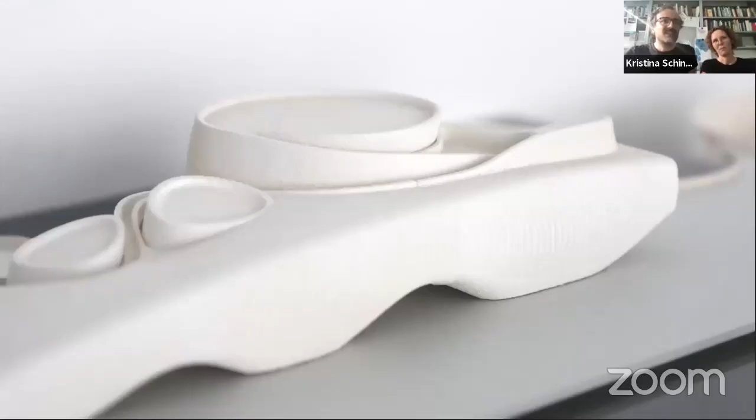Okay, thank you for the introduction, Lara. Thank you also for the invitation to have us here at this TACK Talk online lecture series. We are very excited to be part of this research network investigating tacit knowledge in architecture, and we are very much looking forward to exploring that with all members.

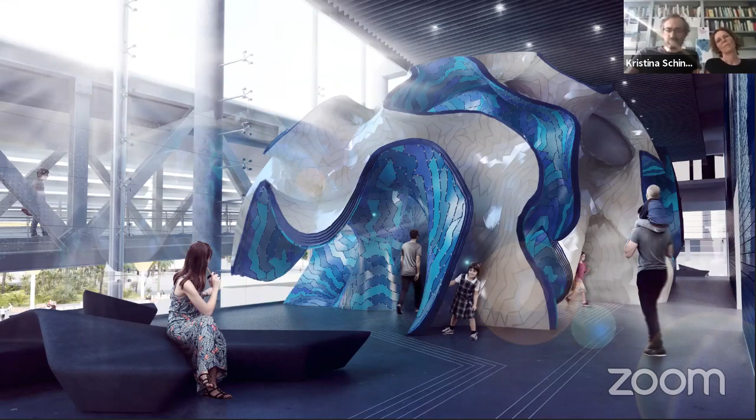As Lara mentioned, our name refers to the sentient body. For us it was always important to refer to the human body as a scale for architecture, but also as the sentient body—the notion that describes how we engage with our built environment through our senses: what role form and space, color and pattern play, but also more ephemeral, atmospheric qualities like sound and light, even material and material performance, especially when it comes to movement.

The key question, and what we'd like to show a little, is how we put all these qualities and pieces together into one design process, and how we negotiate these qualitative things with a more pragmatic framework, which is also part of architectural design.

We usually have very common techniques like the deductive or inductive—bottom-up or top-down strategies. But there is also a third approach: the abductive. In our understanding, that means we approach a certain situation, observation, or phenomenon and try to come up with an educated guess, or ideas for how to complete this observation.

This in our office often happens in comparison with 3D sketches—like here, a loose set of lines, a vague formation not interconnected, very vaguely describing something but highly charged with qualities. By bringing additional readings and ideas to these sketches, we are able to extract various projects from those vague sketches. Here we see a very direct translation.

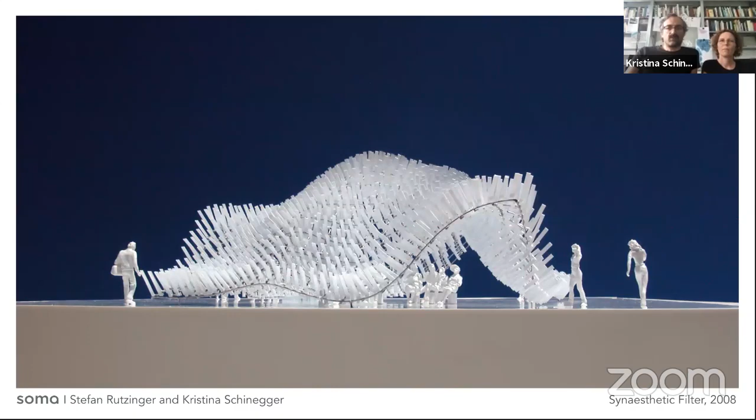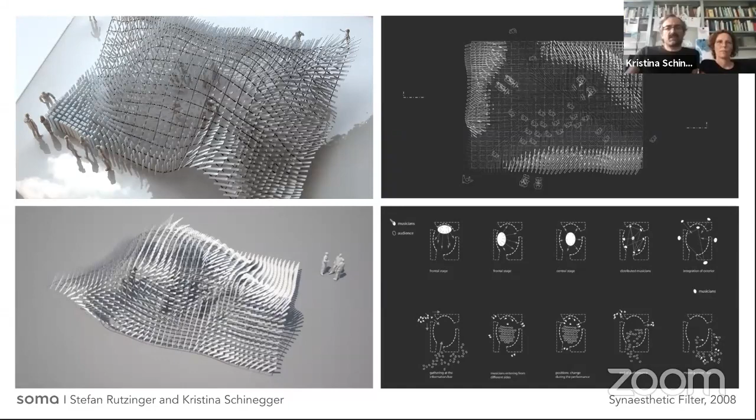In fact, these rotational acoustic panels were changing not only the acoustic qualities, but also the visual appearance or visual effect, which became a synesthetic experience for the visitors.

On the other hand, taking the component-driven design method further, we were looking into structural performance coupled with the visual appearance, and we wanted to achieve a flickering mass for the design of a mobile art pavilion for the Salzburg Biennale.

We had to negotiate the structural integrity of this structure together with aesthetic qualities, so we introduced an evolutionary process to negotiate these two criteria with each other through fitness criteria. You can see how that process dealt with those criteria, and in the end we were very happy with the result.

As you can see here on a photo on site, this pavilion came together as a kind of vague formation of components, a flickering mass which makes people curious about the inside and what is going on inside. At the same time, the chosen material became very relevant.

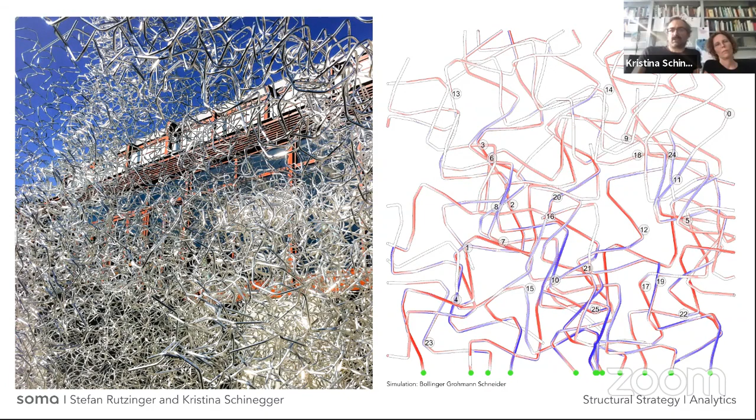In order to understand why these individual members really hold together and how the forces go through the structure, we also did some small simulations together with the structural engineers.

Finally, we ended up with this kind of design where you can see we created a very soft structure, a weak structure one could say, but stable enough to build up towers up to 9 meters.

We were able to reach spans or arches up to 5 meters, where the wind was going through, but weak enough that you could imagine the swaying of the towers, while people were still observing and enjoying the summer pavilion.

Now, these were all some samples of how we develop designs from component-driven concepts. I would like to show some quite small examples, and also how bigger structures and bigger designs can develop out of such ideas.

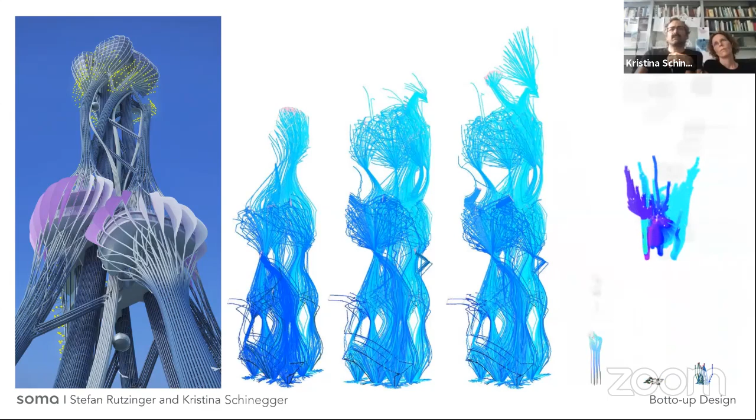Here, for example, we investigated how particles, a set of particles aware of each other, rendering a certain behavior together, are studied. By tracing those sets of particles we are able to deduce certain structural but also aesthetical design ideas, which then have been transferred into the tower structure.

You can see how in some areas the traces are dense and combined into strands, while in other areas they are unfolding, and you are able to inscribe function and program into those areas.

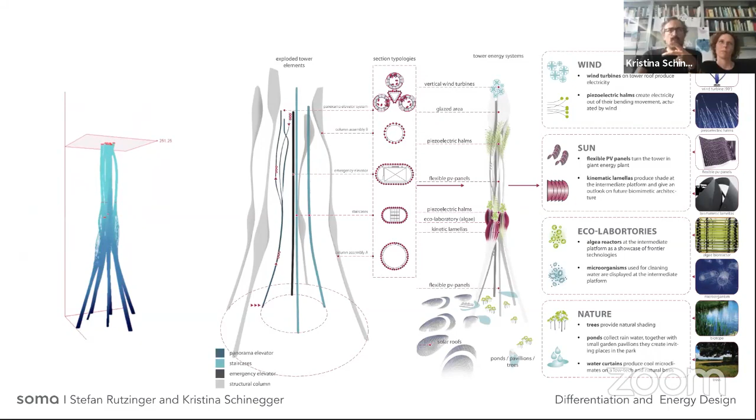But I think the most interesting and striking part was that in the end we were able to develop an open tower structure with open cross sections, as a direct translation of the traces of those particles.

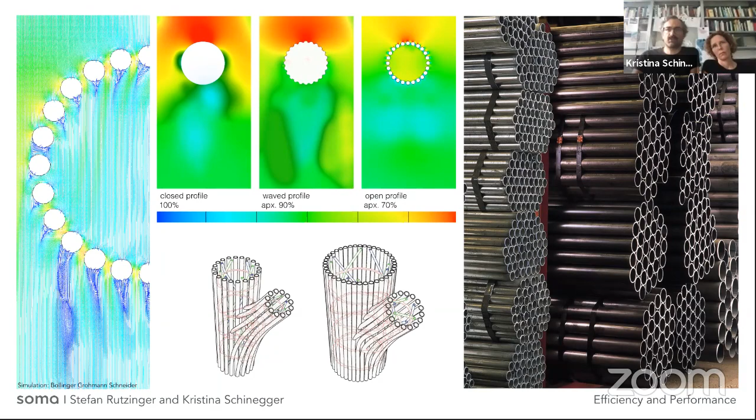We were able to prove that this open tower structure catches much less wind, up to a third less wind load in our simulations, meaning also a third less material needed to build the tower, and a third less cost, which was then invested into the special construction and appearance and form of the tower.

That investment also went into a whole variety of alternative energy concepts which have been applied to the tower.

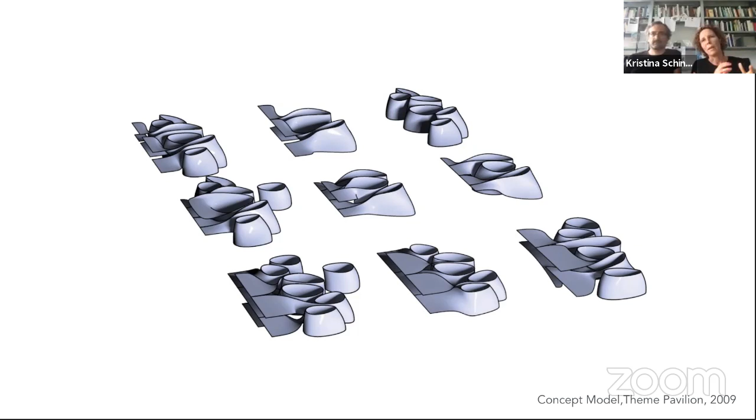In the end, it's always important for us to have these poles, the principle, the essential idea that you can communicate and that it's immediately understood. Here it was really this vessel that has the vertical orientation and is able to transform into the horizontal. There's also this bandwidth of transformation you can explore, and during the design and building process you can adapt to changing requirements and constraints within a project.

So this idea, we like to enrich a lot. We like when things become productive in a spatial, organizational way, also in a structural way. This one idea organizes the main spaces in the building, the main exhibition spaces and the lobby. It separates them and connects them at the same time.

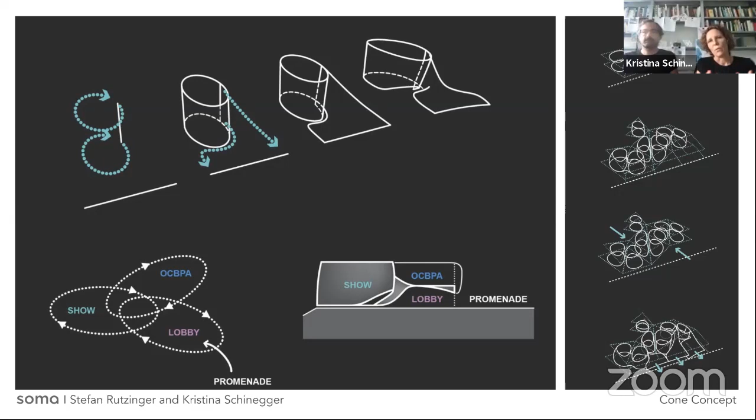We also have the design system of these interconnected types that were first in a regular grid, and then as they transformed, they were always interdependently changing and altering each other.

And then of course we like to test a lot. This, for example, is a twin type that we then have a closer look at, and we always like to evolve ideas — for example, how that could then help develop a circulation and this immersion of entering and exiting the exhibitions.

But of course, we also always like the idea of the concept model, the model where these ideas synthesize and are still very expressive of the intent we have. You see here how this aggregation of the originally 7 volumes turns into 6 volumes, where one gets a platform and the other gets bigger because the function and interior program changed during the course of the project.

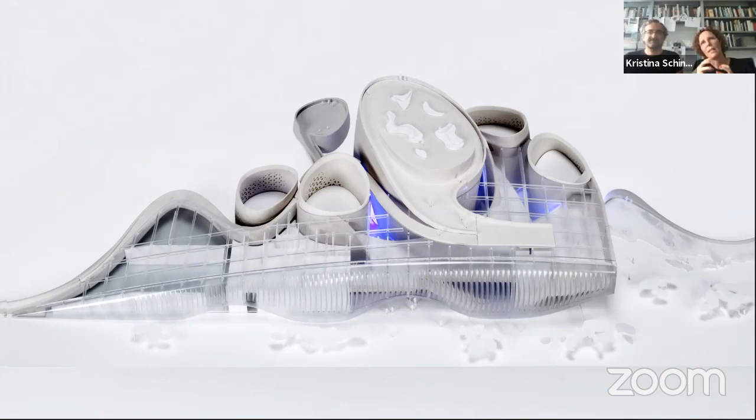On the other side, we like to negotiate these systems. Here we have the cones, later made out of concrete, the steel structure, and the kinetic lamellar facade, and how these two systems are negotiated with each other. That's something where we really find it useful to have these reduced models — they might be digital, but also physical from time to time.

The kinetic facade was actually a very challenging part of the project, and probably where the guessing came into play most, because when we were envisioning this facade — this seamless swaying facade that moves without a visible cause — we were really not sure how we would be able to build it. We teamed up with Knippers Helbig Advanced Engineering and together developed, we can really say, a novel facade.

The novelty is that it's dependent on material capacity. So the movement, the geometry, the material, the choreography all together create a synthetic whole. And the facade became a very efficient way of opening, a kinetic device.

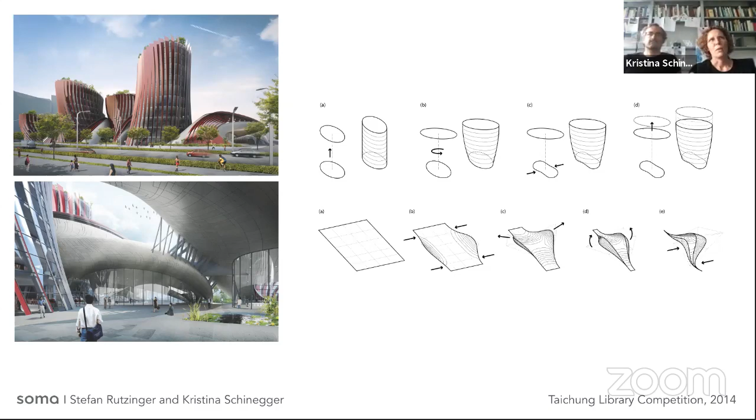In the beginning, we of course look at constraints a lot, also at organization, at spatial requirements. We read the brief very carefully, but we also communicate, as I guess most architects, through visual images a lot, because these vague ideas for us often end up in a collection of words and images, and in these images there's all this implicit design knowledge embedded.

And of course, since we work together now for almost 20 years, we share a lot of our visual memory also, so this ping pong is even much more immediate. But when you come to it, it's easy to formulate these ideas and easy to find the imaginations or the visual images that you have in your head and share them.

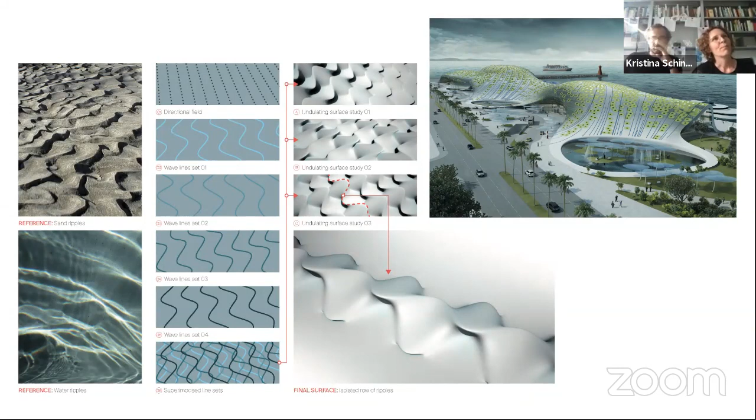And so we were really lucky that just now we were starting a big research project. It's a special research area together with TU Vienna, the GCD, the Center for Geometry and Computational Design, which is in the lead, and TU Graz. And as you can see, we're a team of architects, engineers, computer graphics, mathematics, and informatics.

We're a research cluster working on several areas. Our sub-project is embedded in design methodology. We also have projects working on the visual and haptic design interactions, on the immersed designer, if you wish, who now has different tools to interfere with design. And also we have projects working on materialization, evaluation, and form finding.

Our project is called Computational Immediacy, because what we are trying to develop in the next 4 years - and hopefully it's going to be prolonged to 8 years, which is possible within that program - is we're working together with the Institute of Mathematics, deploying neural networks, machine learning, to retrieve implicit design knowledge that resides in objects.

So the idea is that we create a simple workflow that later on can be extended into a bigger early design stage workflow, where the designer can state certain explicit constraints or design decisions, and then literally picks images and mixes them. What the network that we are developing with the mathematicians does is retrieve 3D point clouds from its own visual memory that we feed it with, and suddenly the designer gets suggestions of 3D objects already and does not need to do that translation.

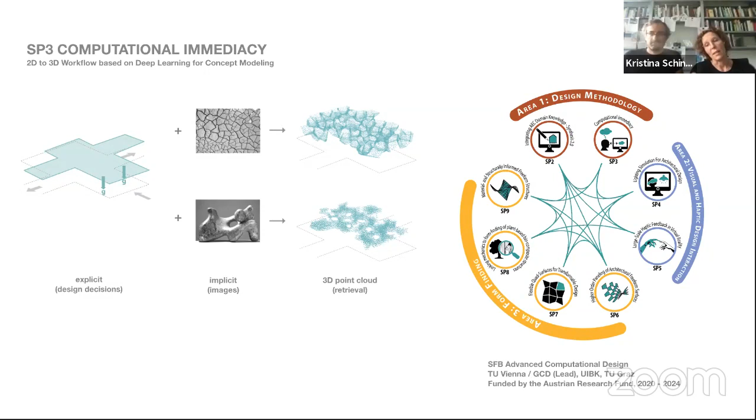Now, of course, this is a very ambitious project. We're aware we started actually 2 months ago. We're super excited, and I think it's also what all our different poles between the geometry and the idea to go beyond geometry brought us to, and now it's really interesting to do that in a research setup.

We also would like to show you the recent speculation that we ourselves immersed ourselves into. This is also what we showed at the Tallinn Biennale, and we were very lucky and happy to collaborate with Paula Strunden there. She did the VR representation of a part of our project, and it was really interesting to see your own work through somebody else's eyes and also device.

This is probably a first idea of what it could become spatially, or what the qualities could be, or the materials that it might get, and also maybe fabrication, maybe it's woven. So we really like to indulge a little bit in these qualities. We enjoy that very much, and we like to keep these things open.

We now look forward to connecting that back to the idea of machine learning and this retrieval of implicit design knowledge in objects, and also the materialization later on, a direct materialization. So the idea is that while receiving these point clouds, we will also find a way that you can directly print and fabricate them. The idea is really to get rid, in a way, of geometry, get beyond geometry or this geometrical determination, and really create an open design process where during this early design phase you can still go in a completely different direction as a designer.